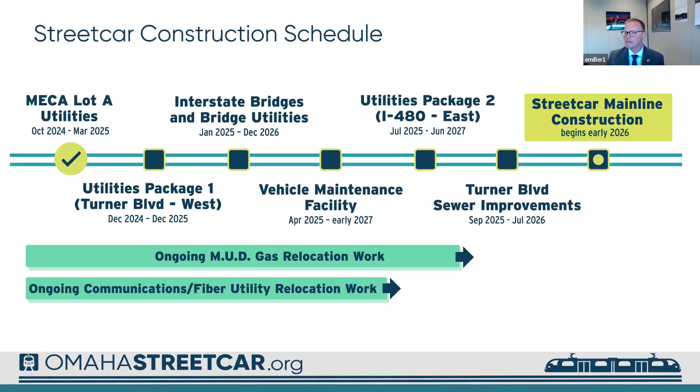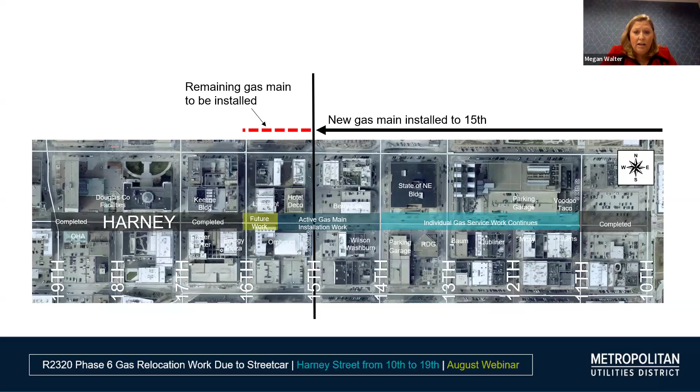Our first slide is phase 6 in the Old Market. Our crew continues installing new gas main along the south side of Harney Street near 15th and will proceed westward towards 16th Street. When construction reaches 16th Street, anticipated within the next 2 weeks, it will be necessary to close 16th Street south of Harney for approximately 1 month due to the scope of work required. New gas main installation has already been completed from 10th to 14th Streets; however, work is ongoing in select areas along this stretch to install new individual gas services and connect them to the newly installed main. This phase includes additional excavations along the route. MUD continues to work with customers to relocate inside gas meters to the exterior of buildings for safety reasons. This phase's anticipated completion is mid-September.

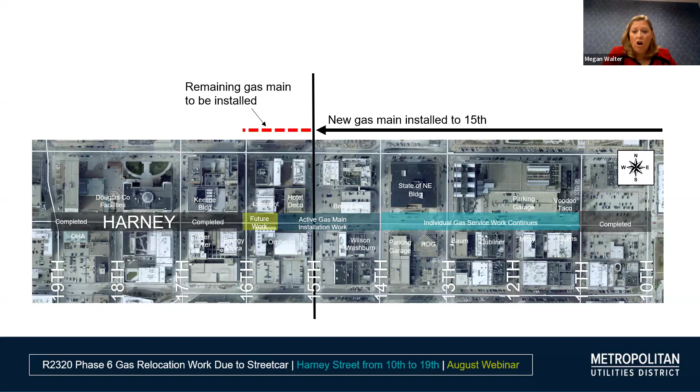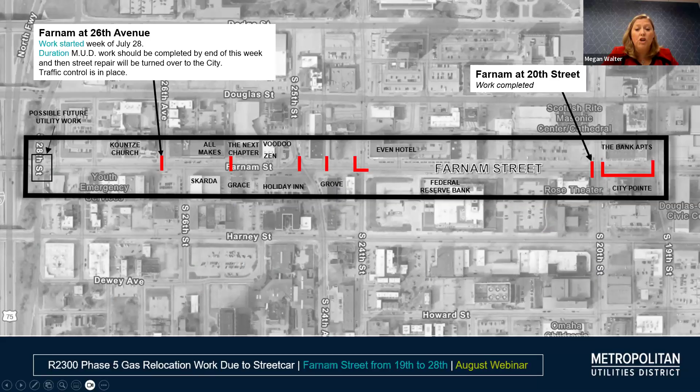Our next slide covers phase 5 on Farnam. MUD has a second crew currently working on Farnam at 26th Avenue. This portion of the project is scheduled to be completed by the end of this week, and then street repair will be turned over to the city. Once work is finished in this location, the crew will move to Harney Street at 28th Street to begin the next phase of the project.

MUD will continue in select areas, primarily at intersections within phases 5 and 7, to stay ahead of the city's future planned utility work. Areas shaded in gray represent work completed. Red areas indicate current or soon-to-be active zones, and the work remaining in Phase 7 and Phase 8 is planned for this year. For safety reasons, pedestrians should use caution where holes have been dug, and vehicles should slow down in construction areas. Thank you.

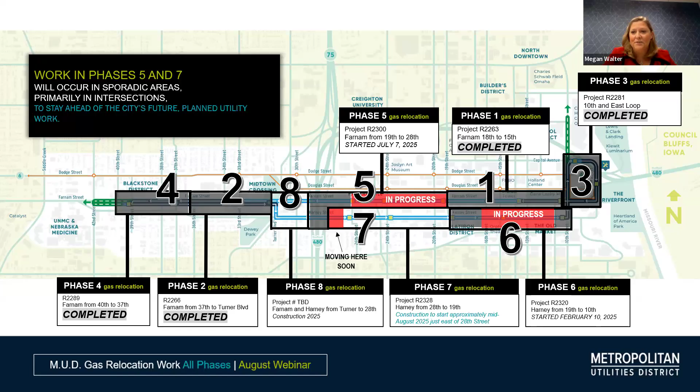The mat slab foundation that's going to be created for this, they're going to start pouring that, I believe, Monday of next week. It's going to be built over multiple pours. It's an encapsulated slab, and as you drive by, you'll continue to see that going up. The maintenance facility is planned on being finished late 2026 to early 2027, and is proceeding right along. And that's about where we're at now.

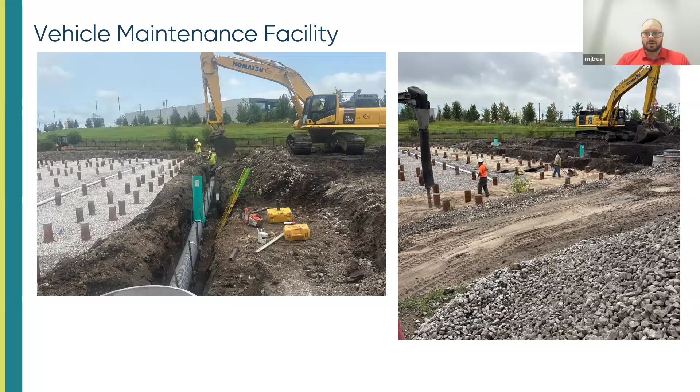And next, I'll turn that over. I believe it goes next. Yep, Mr. Rue. There we go. Thanks, Mike.

So we're going to recap where we're at with the West Utilities package first here. As shown on this slide, phase 1 is complete. So from Turner to 33rd Street, essentially, we've seen all those barricades move to the west. The contractor's out of there. So that's fantastic.

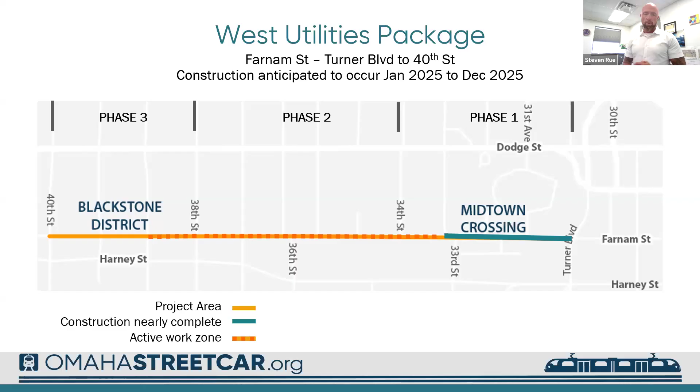Right now, you can see the active construction zone with the dash line there. That's phase 2, so that's where we're at now. We're working from the end of phase 1 there, almost all the way to the very edge of that Blackstone district. And then as we approach the last third of the year, we're going to move into phase 3, which will be that last district.

I will say, following the work that's been done here, street maintenance needs to move in. Obviously, with the construction going on, it was a little difficult for us to do all of our typical repairs. So we have a little bit of work to do in the curb line. That'll occur in the next week or so. That should all be very short, extremely minimal impact to any traffic patterns. But if you see a few cones or barrels show up, we're just taking care of some things we couldn't do during construction. You might see a few brief instances of that, but really that work should be done until the next package starts.

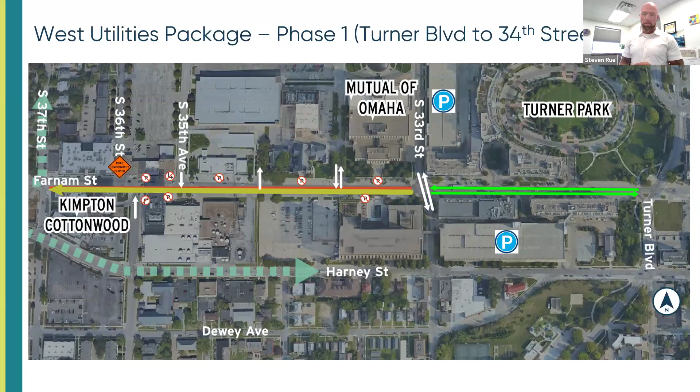As we go to the next slide here, we're going to talk about phase 2. Again, continuation of a lot of what we saw in phase 1. We're doing the sewer main work, water main work, and the duct bank work that's been going on through here. So very much like what happened in phase 1, we've moved to phase 2. We are westbound only through here still.

We're showing some optional detours through here. If you're trying to go eastbound, the easiest thing to do is use Harney. Harney is also your best access if you're trying to get to parts of 36th Street. We still have some northbound only sections of 36 just south of Farnam there. So if you're trying to get to the Cottonwood or over in that area for some other reason, you'd want to take Harney back to the east, and then you can use the two-way traffic on the south end of 36 there. It's kind of shown by those white arrows.

As we move through the project, just be alert for other temporary traffic control changes, just like we did in phase 1. There will be some lane shifting. There will be signs out in the event that we have to shut something down or restrict a turn somewhere. So just, as Eric mentioned at the beginning, use caution, use patience, and read the signs as you go through.

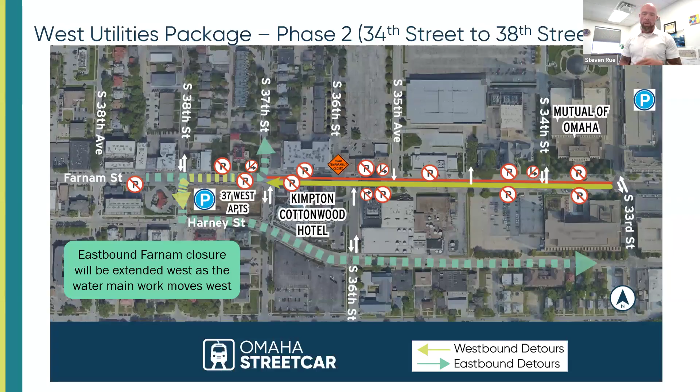There's no parking through this area right now, so we can use the parking garages to the east. We're still doing the 2 hours of free parking, so those 2 big garages in Midtown are available, and then we have the parking garage between 37th and 38th Street that's available, so we can park there and walk to access these businesses.

Looking forward into phase 3, which we'll move into as we approach the end of the year. There is some work occurring right now on 38th Street, just west of Farnam and just west of 38th Street. You'll see work occurring through there as Hawkins continues to progress through this project. The remainder of most of this work will get picked up when we get into phase 3.

As we get into phase 3, remember we have this additional lot that was constructed on 40th and Harney that can handle about 23 spaces. We still have the parking garage on 37th and 38th with the 2 hours free - I think there's like 3,000 spots in there - so you can still utilize that to get through.

As we move into phase 3, you're going to lose a lot of that on-street parking through here. So if you patronize this area, we can use these parking facilities, or just start being conscious of other places you might want to park.

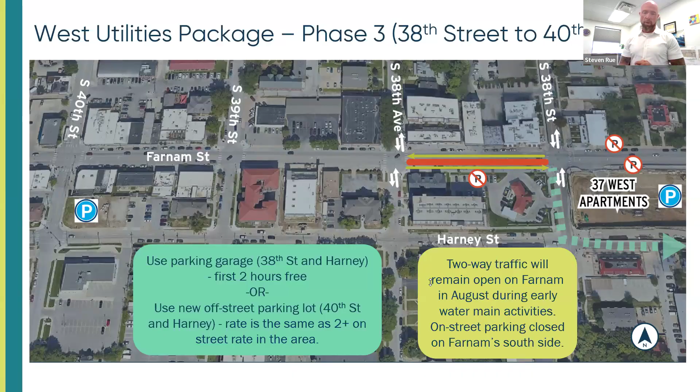Moving on to the bridge project - if you happen to drive by, they poured the deck over the weekend, which is fantastic. That's always a huge accomplishment for any bridge project. The deck pour went great, really no issues.

So it really looks like a bridge now. I think I keep saying that every month, but if you drive by now, it actually looks like a bridge. There's still a good amount of work to be done - they still need to go in and do guardrails and some of the other work through that area.

Other upcoming work not related to the bridge itself includes some pavement work at 29th and Harney that is occurring right now, anticipated to open August 15th. That intersection will open August 15th. On the other side of the bridge at 28th, there is work anticipated to start August 11th.

So those two will slightly overlap there, but through the coordination of all the work we have here, we're seeing these closures that were anticipated to be much longer turn into maybe a 3 or 4 week savings on the duration of the closure through these areas. So really good work happening here - this project's going really well, everything's ahead of schedule as it stands right now, so that's great.

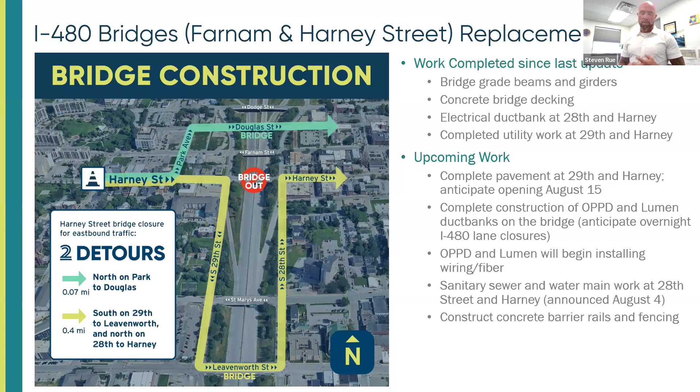So other work through here that needs to be complete, outside of the obvious remaining bridge work, includes OPPD work, some Lumen work through here, and then just some other work in these intersections around the bridge.

Here we're showing some of the optional detours you could take for the closures that we have here. Obviously you cannot access 480 from Harney Street right now. I would suggest - all these detours are awesome - but I'd strongly suggest that if you're trying to get around, which is what most people do anyways, use the app on your phone and that will take you to the correct place.

We do a very good job of making regular updates to Google Maps, Apple Maps. We're trialing out some new software right now to actually have live lane closures and stuff updated into these apps, so in the event we have to close a lane for a couple hours, we should have the ability to communicate that back and forth.

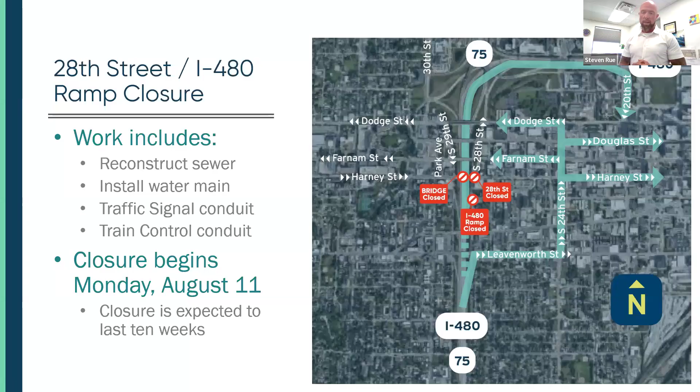So you can use these detours - I like to use Dodge if I'm trying to get on 480. I know other people are using Leavenworth to get downtown. I'd just suggest you use those map features that most people probably have on their phone to help facilitate as we change traffic control through here.

The East package. I guess this would be my first week talking about the East package. I can take it, Mike, because it is active now. Okay, if you want to talk about it, go for it. You work so hard, Mike. It's cool, I can take this for you.

The East package has started, beginning Monday. This East package is a larger version of the West Utilities package occurring right now west of Turner. This one is east of Turner. This is a big sanitary and utility project. It started Monday in what we're calling the Loop, around 10th and Capitol, that little square the dashed line makes. We're going to see more crews added to different zones in the coming weeks. We're coordinating with MUD and OPPD to facilitate this work as we work our way into what's eventually going to be a very large circle from 28th to 8th, Farnam to Harney.

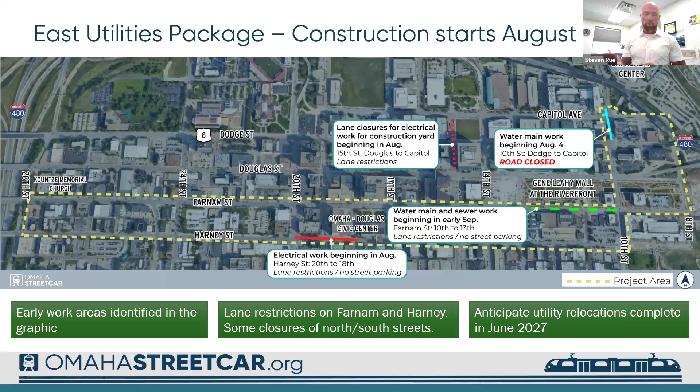We're going to be looking for lane closures for electrical work beginning August 15th, designated by the red line there, and water main work beginning August 4th. That was Monday, so if you've been in that area, you've probably seen the road is closed. We have ample signage there to communicate everything, and traffic control is a big deal, so everyone should be aware that's closed now. We're also showing other anticipated work: water main work beginning early September on Farnam, and electrical work beginning in August on Harney from 20th to 18th. We'll talk more about that when we get to September.

No, you're good. You're good, Wendy.

So the East Utilities package, just to highlight where they're actively working right now: the 10th and Capitol area, what we're calling the loop, which is really more of a square. The closure began Monday, and we're looking at water main work and sewer work to be completed by August 28th in this intersection. You can see where those road closures are. If you're down in this area, you're aware of it since Monday. If you're going down there, these are closed. We'll have signage, and you can utilize those apps if you need to get around this area.

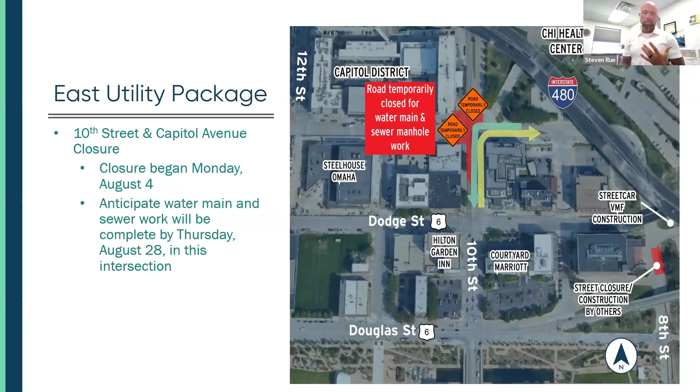Mike, I'll give you this one though. It's not active construction. Awesome.

Thank you, Steve. This is our Turner Boulevard package. It's slated to begin Q4, maybe late Q3, call it late September, early October. The bids will actually come in on August 20th. The big thing is at the Farnam and Turner intersection, you can see it here. There's a little bit of a diamond pork chop in the road itself. In and around that area you'll see a manhole lid that expands out to a very deep sewer, roughly 40 feet deep. We anticipate we're going to have to dig down.

This is also where Turner Creek used to be, so we've got large sewers, several combined. It's a combined system with several large other pipes coming into that one. It's going to shut down that intersection starting in January, running through April. The design is complete, and there's another large sewer down in the Harney area where we have to reconstruct another manhole. The intent along there is to do what we call a pipe-in-pipe, or a class 4 structural liner, where a liner goes in and supports it, acting like the new pipe holding up what used to be there. This is slated to have substantial completion by fall of 2026.

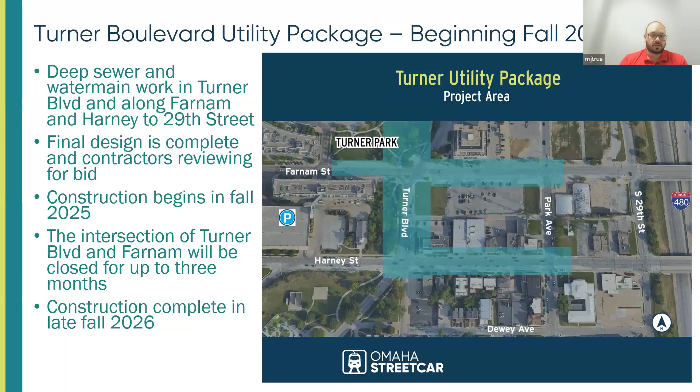Obviously if you're coming into this area we're going to have some shutdowns, but also remember, you can see it on the right edge of your screen, the Harney and Farnam bridges. Harney is supposed to be wrapped up by the end of this year, and Farnam starting next year. So when that Farnam and Turner closure goes, you're also going to have that bridge go. We'll be posting, and by September or definitely by October, we'll have more routing and understanding of how that's going to happen. Just to give everyone awareness, going westbound on Farnam is going to get a little more difficult, particularly next year, and that's where this particular one's at.